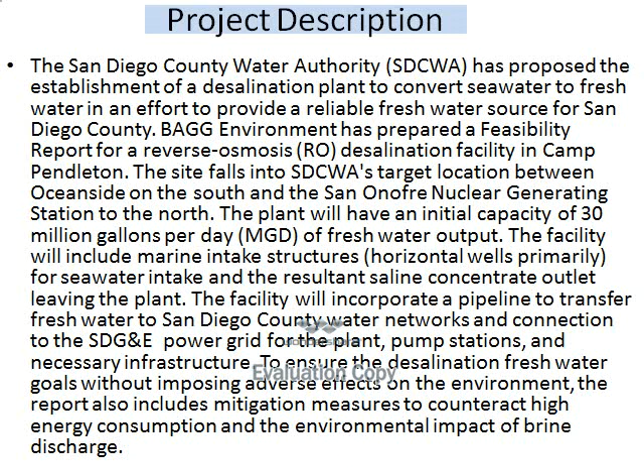The project site falls into San Diego County Water Authority's target location between Oceanside on the south and the San Onofre Nuclear Generating Station to the north. The plant will have an initial capacity of 30 million gallons per day, MGD, of fresh water output. The facility will include marine intake structures, horizontal wells primarily, for seawater intake and the resultant saline concentrate outflow leaving the plant.

The proposed site on Camp Pendleton was chosen for its proximity to existing power and water grids, for its adequate soil conditions, and for its sufficient coastline of 1.7 miles to accommodate the horizontal wells. The Camp Pendleton government land also provides access and facilitates quick construction of the desalination facility.

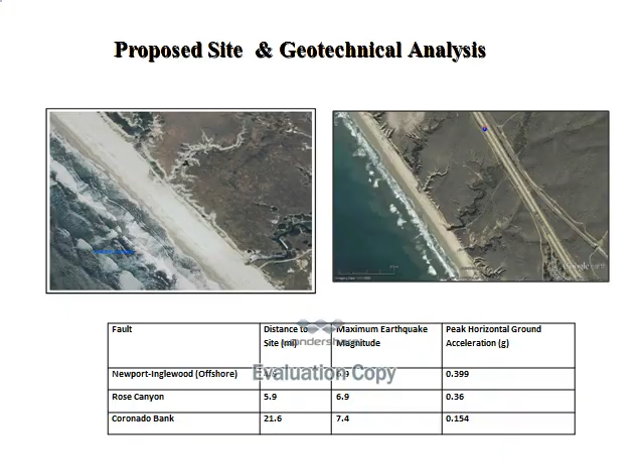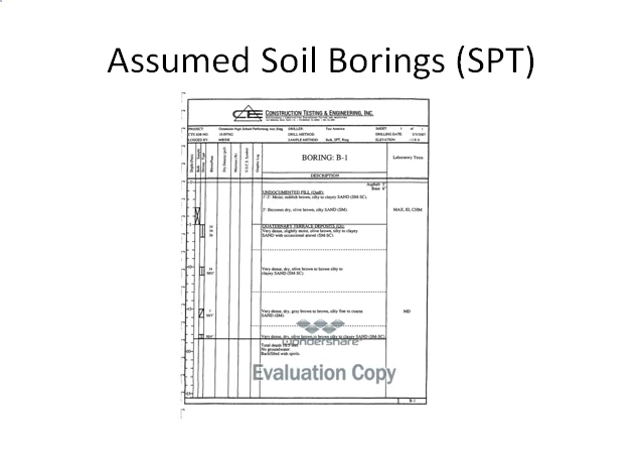The geotechnical investigation found no active faults run across the proposed site. The biggest threat to the site comes from the offshore Newport-Inglewood fault, capable of a maximum earthquake magnitude of 6.9. The soil borings for this site were assumed under SPT analysis to be the same as those of the Oceanside High School Performing Arts Center, which is located roughly 5 miles to the south on comparable soils.

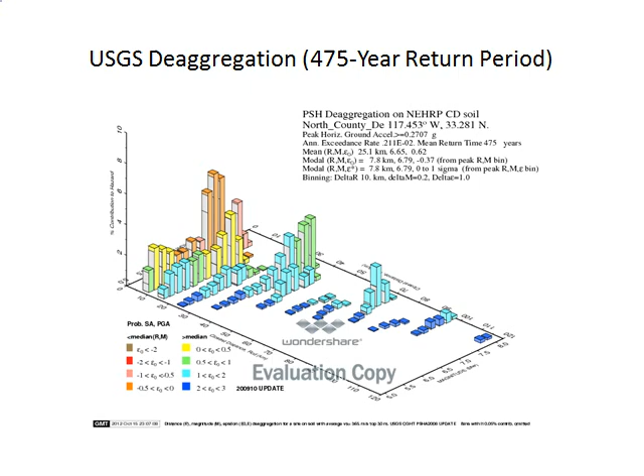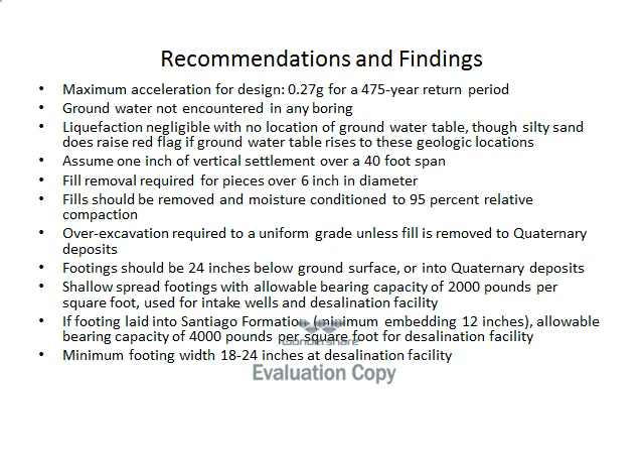The USGS deaggregation plot gives us a 475-year design return period in which the peak horizontal ground acceleration will be 0.27 g. The geotechnical recommendations and findings are given below, with the main points being a 0.27 g design maximum acceleration, negligible liquefaction with the absence of a groundwater table, and the spread footing allowable bearing capacities are given below.

BAGG Environment also conducted a road study to determine the feasibility of bringing in a paved road to the North County desalination facility. The proposed extension is 1.3 miles long along existing dirt firebreak and access roads. This should minimize the impact on the environment. This road will connect with Interstate 5 at the Las Pulgas Road exit and should provide for the assumed roughly 200 average daily trips to and from the plant between construction and operational phases.

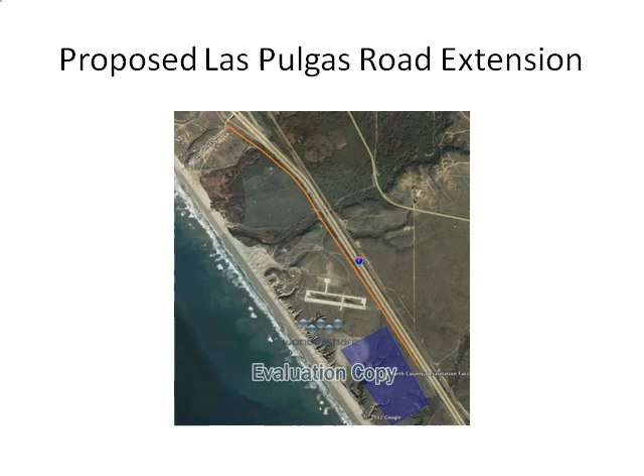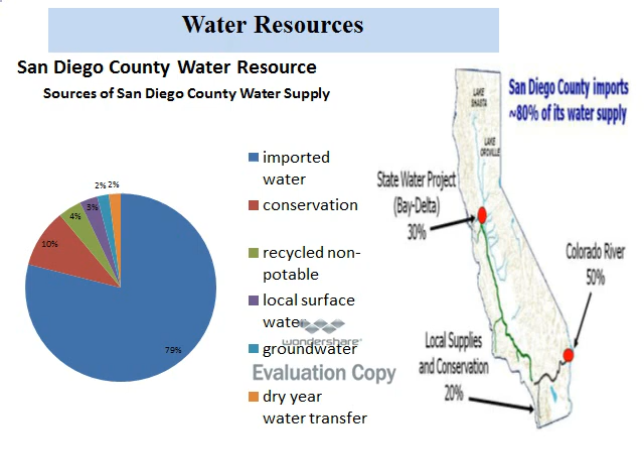Water demand. Water demand projection provides the basis for evaluating future water supplies. Based on our findings, water is likely to be the most critical challenge that the San Diego region will face during the next 2 decades. Desalinated seawater is the future source. It's expected to be a 10% source of the regional water supply by 2020, which is about 80 MGD.

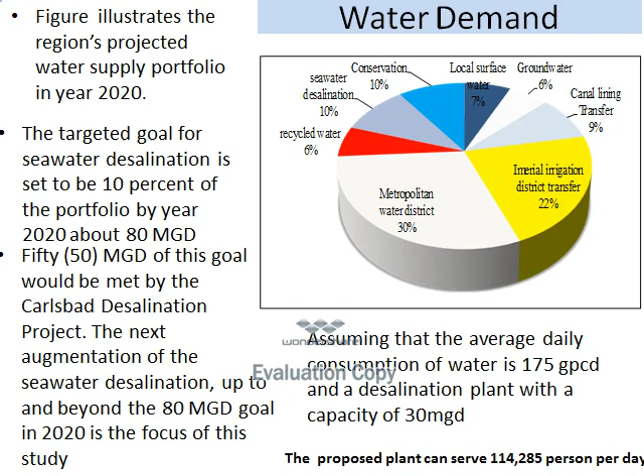50 MGD of this goal would be met by the Carlsbad Desalination Project. The next augmentation of seawater desalination up to and beyond the 80 MGD is the goal of this study. This figure shows the historic and the projected demand of the San Diego County region.

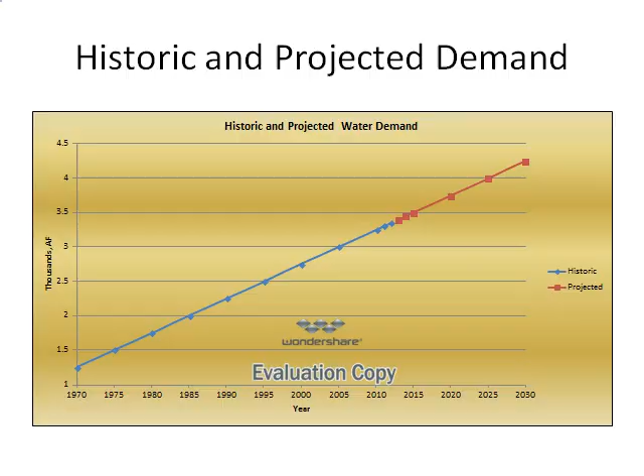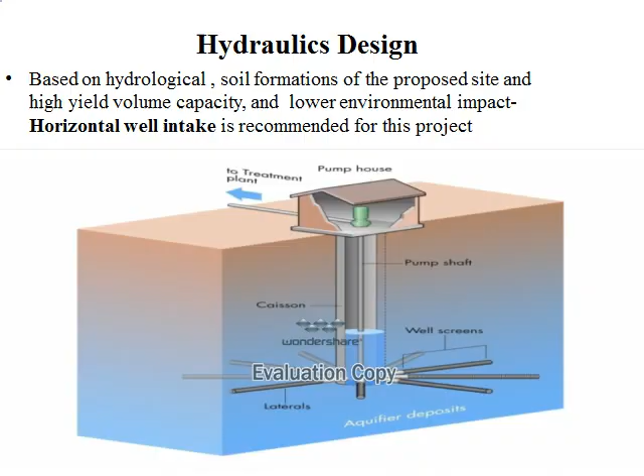Based on hydrological soil formation of the proposed site, high yield volume capacity, construction cost, and lower environmental impact, horizontal well intake is recommended for this project. In order to produce 30 MGD, a total flow of 90 MGD is required. Horizontal well intake construction would include installation of a total of 23 wells. Each intake well has a capacity of 5 MGD.

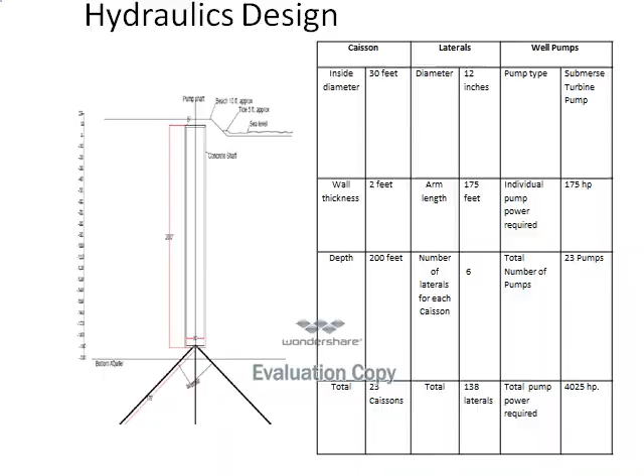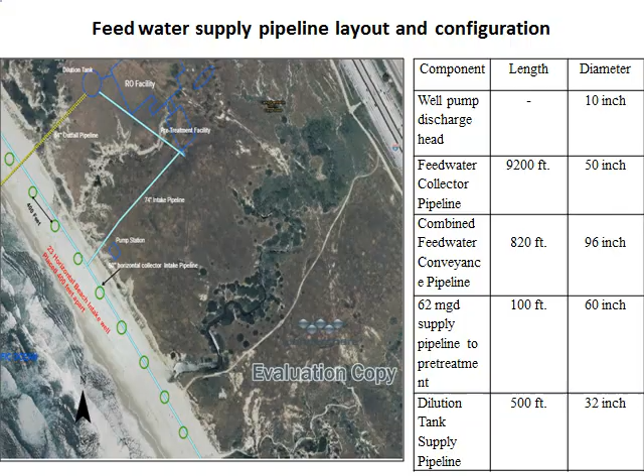Caissons will be constructed from reinforced concrete, wall thickness of 2 feet and inside diameter of 30 feet. Pipe layout. The collector pipeline will be constructed using the conventional cut and cover trenching methods, as shown in a figure. BAGG Environment recommends the following pipe sizing. The following table summarizes the proposed pump requirement to convey feed water to the treatment plant.

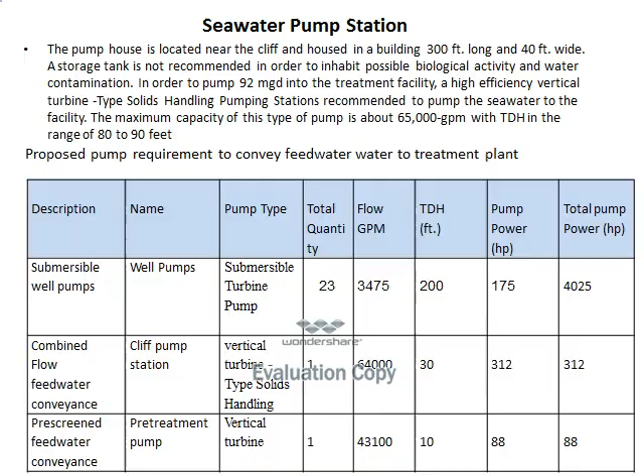Discharge, hydraulic, and environmental design. Prior to disposal of the waste into the ocean, dilution is required. This plant will have a dilution tank and diffuser to do so. The table summarizes the recommendation made by BAGG Environment for the plant to achieve its goal.

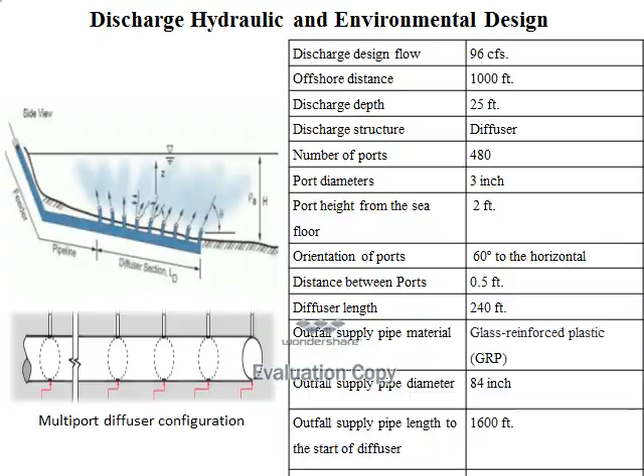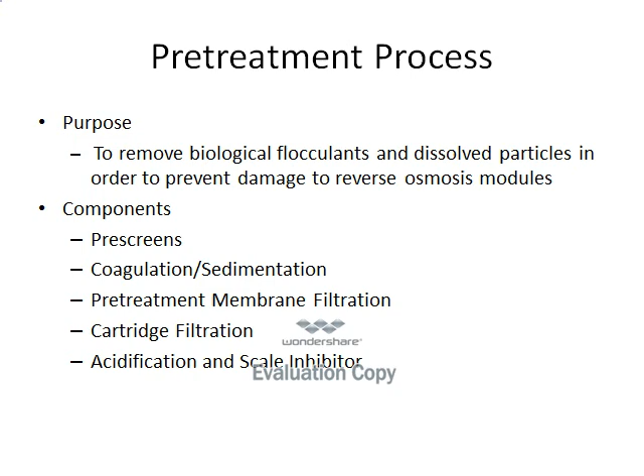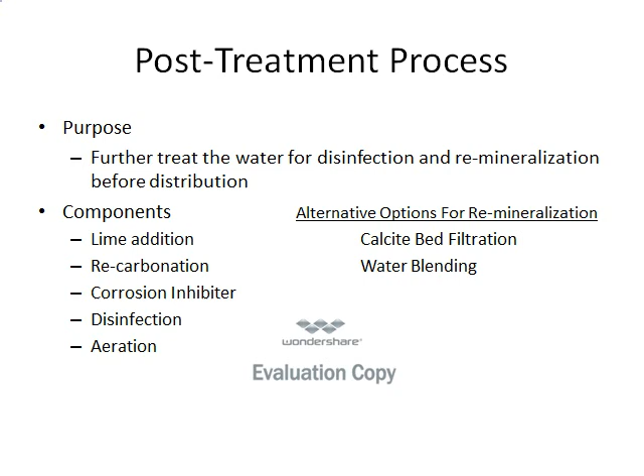After the water is desalinated, it must go through the post-treatment process for disinfection and remineralization before distribution to the county of San Diego. The components to post-treatment process are lime addition, recarbonation, corrosion inhibitor, disinfection, and aeration. Although our alternative options for remineralization are calcite bed filtration and water blending.

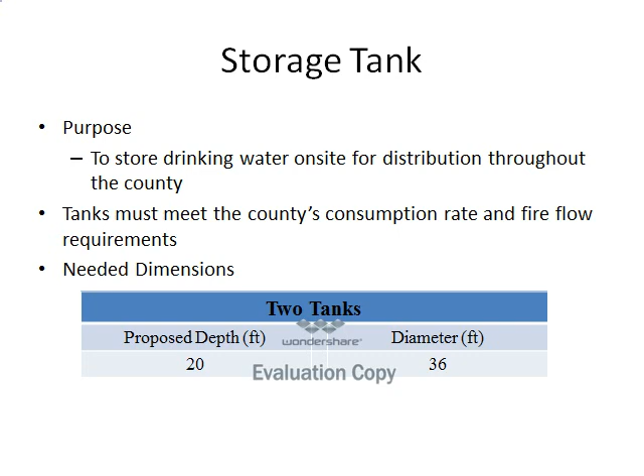The storage tank will be needed to store and distribute drinking water to the county of San Diego. The design dimensions are based on the population consumption rates and fire flow requirements. And our proposed dimensions for 2 storage tanks are 20 feet for the depth and 36 feet for the diameter.

Waste management is essential to safely store and dispose of water and chemicals used to clean the membrane. When treating sludge collected from pretreatment membrane filters, backwashing and solid dewatering will be commonly used. When cleaning reverse osmosis modules, chemical rinses will be done to remove sludge from membrane. The chemical and sludge will be collected into a storage tank on site and will be sent to a nearby solid waste treatment plant.

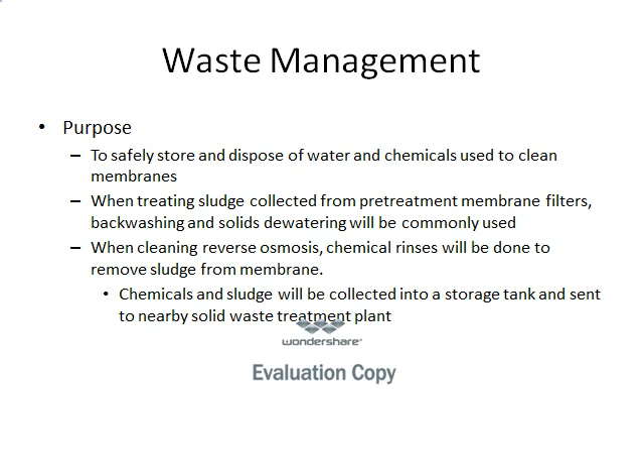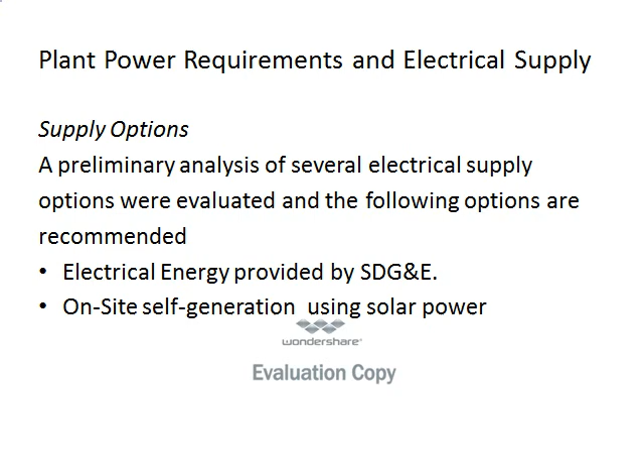Plant power requirements and electrical supply options. A preliminary analysis of several electrical supply options were evaluated, and the following options are recommended: electrical energy provided by San Diego Gas and Electric, and on-site self-generation using solar power. The following table summarizes the solar energy calculation for the project.

We found that for the project we need 1,676 total panels, which is going to produce about 1,843 megawatt-hours a year. The total cost for the panels is about 1.5 million.

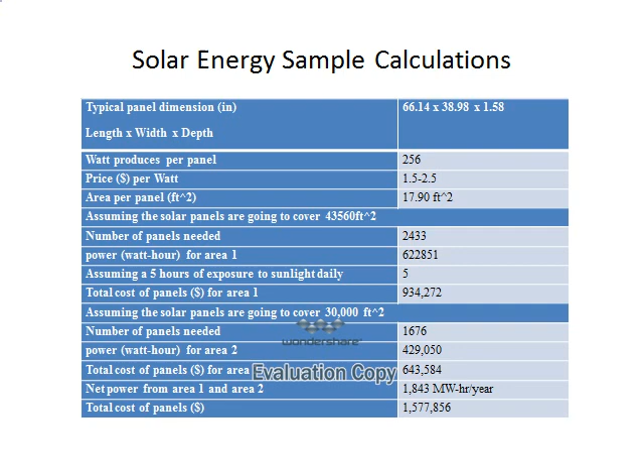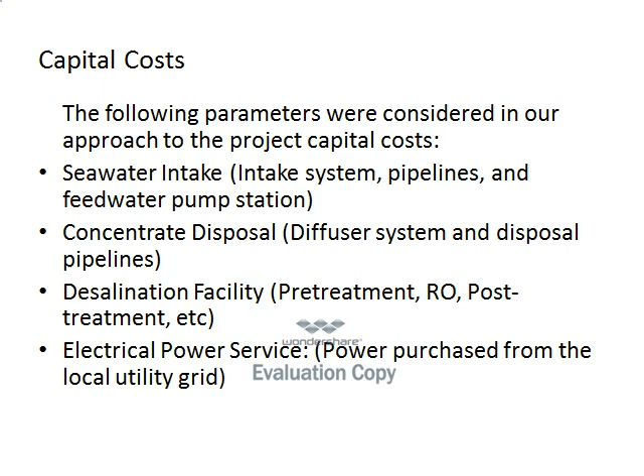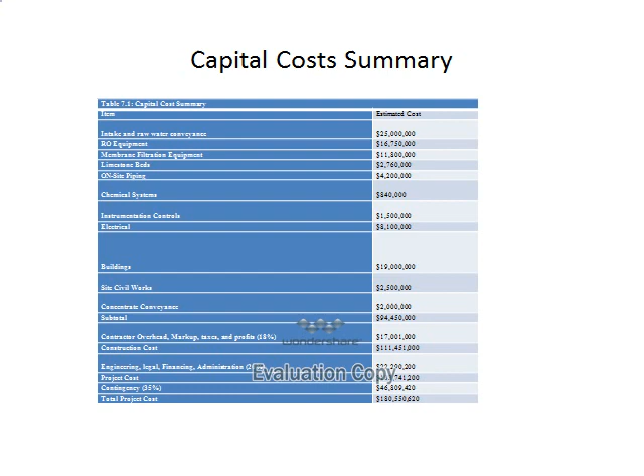Cost development. The costs developed for this project include capital cost, operation and maintenance costs. The capital cost. The following parameters were considered in our approach to the project capital cost: seawater intake, concentrate disposal, desalination facility, electrical power service. The following table summarizes the capital cost for the project. We estimated the cost to be $180 million.

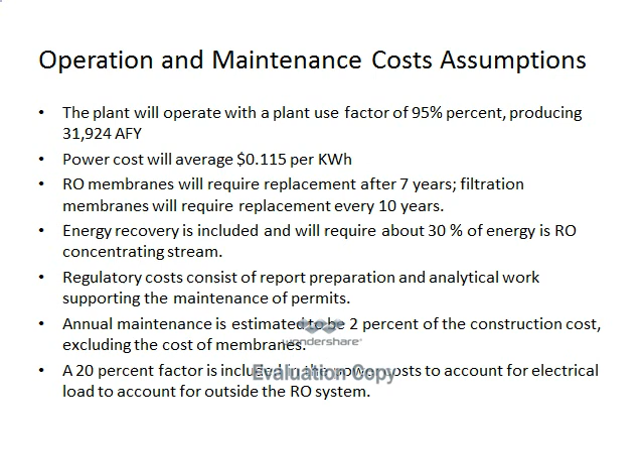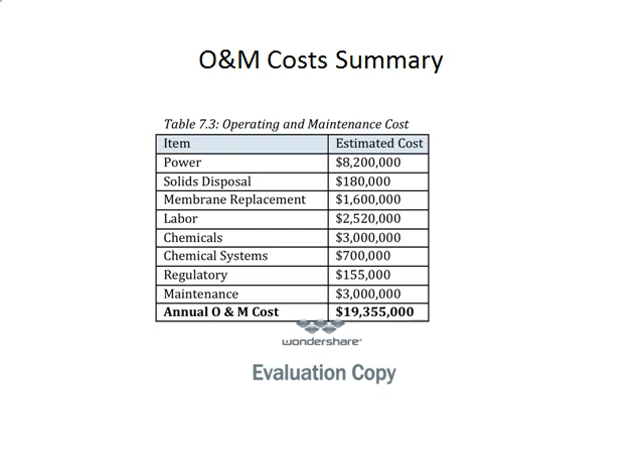The following assumptions were made to evaluate the operational and maintenance costs. The following table summarizes the operational and maintenance costs. We estimated the annual operational and maintenance costs for North County desalination project to be about $19 million.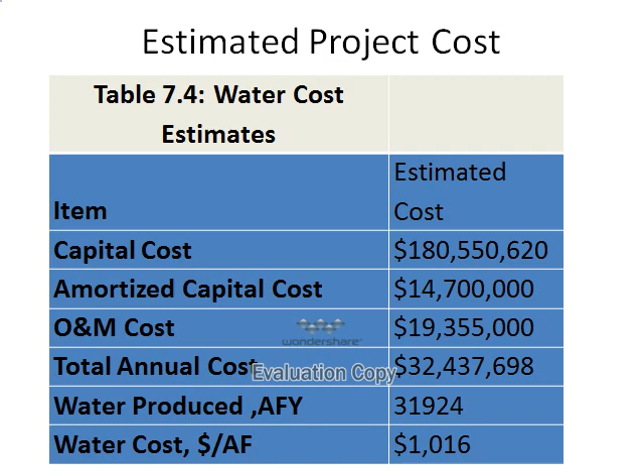In addition to the feasibility study, BAGG Environment also studied the environmental impact and mitigation measures that would result with this project. The integrated environmental impact assessment includes the following: intake and brine impact, energy uses and emissions footprint, the positive and negative impacts of desalination, and the socio-economic impact.

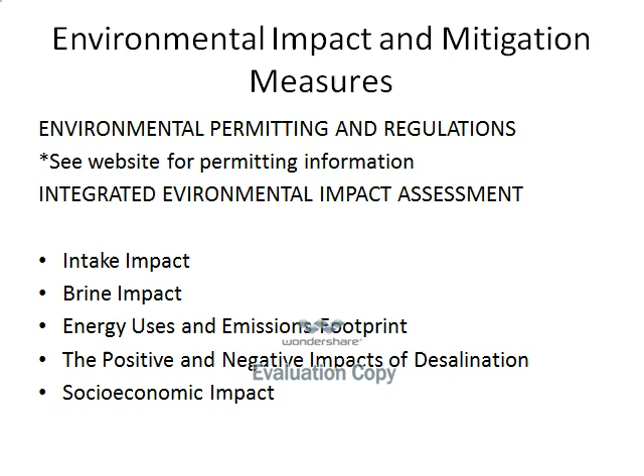Most importantly for the desalination plant was limiting intake and brine impact. Intake impact was limited by the use of horizontal wells so as to avoid open ocean intakes. Brine impact was limited by the use of diffusers and a dilution tank. The following series of tables represents the potential adverse impacts and the possible mitigation measures that BAGG Environment discovered in the research of the North County desalination plant.

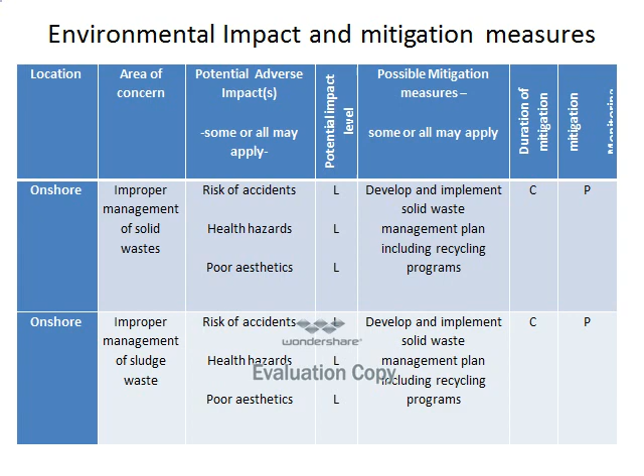Of these assumed potential adverse impacts, most important included the improper management of solid waste and the improper management of sludge waste, which can be mitigated by the development and implementation of a solid waste management plan, including recycling programs. Other possible environmental impacts included the improper care of raw chemicals and hazardous waste, which could be mitigated by implementing waste management plans and providing a designated container and areas for waste accumulation, along with proper disposal and worker training to deal with said waste.

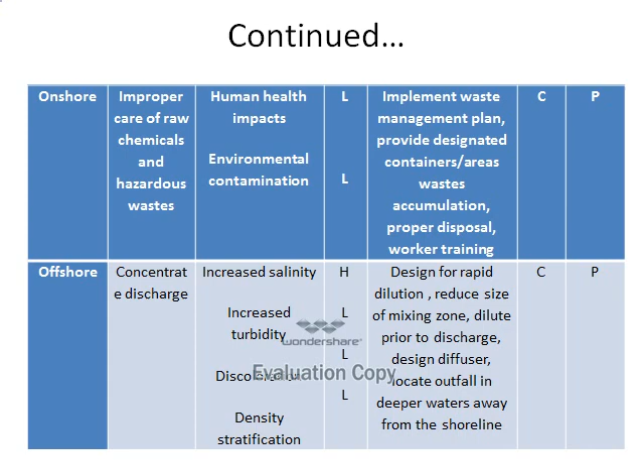Concentrate discharge can be mitigated by rapid dilution design as well as diffusers into the ocean. The technology recommended by BAGG Environment will also produce clean water and mitigate the impacts of pretreatment backwash streams and the RO membrane cleaning solutions added to the concentrate. The technology used by BAGG Environment is considered to be very effective in producing clean water.

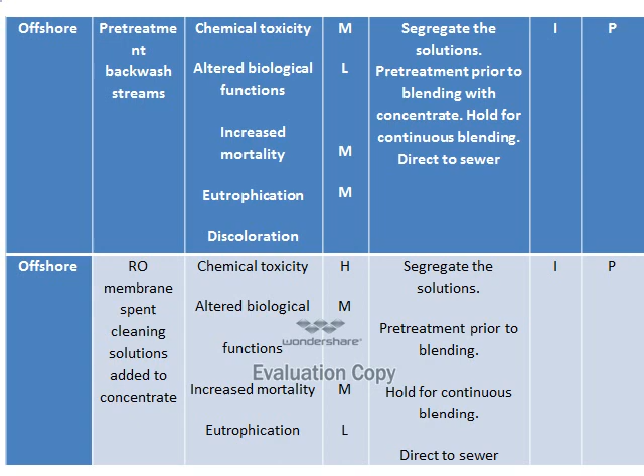BAGG Environment would like to thank you for your time today and let you know that the North County desalination plant is a feasible and viable option for the future of clean water in San Diego County.